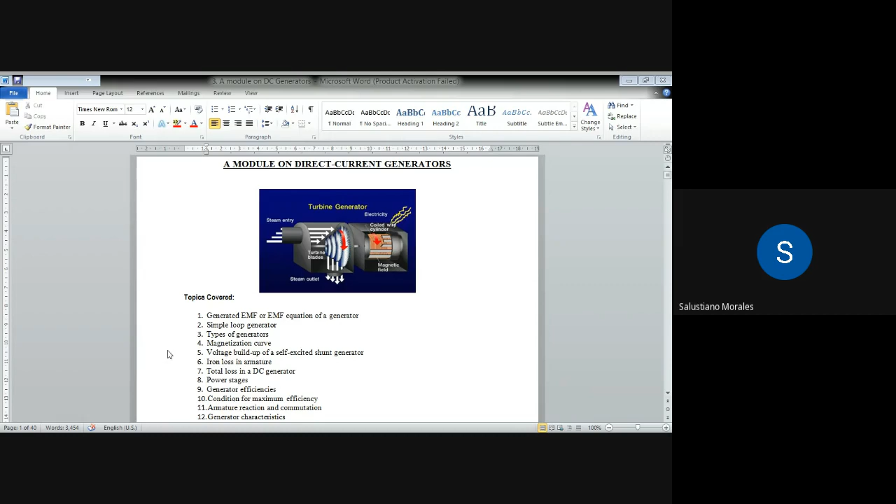So we go now with the next topic, about the direct current generators. So what are the topics we're going to discuss in this chapter? There are 14 topics. Number one is the generated EMF or EMF equation of a generator. Second, simple loop generator. Third, types of generators.

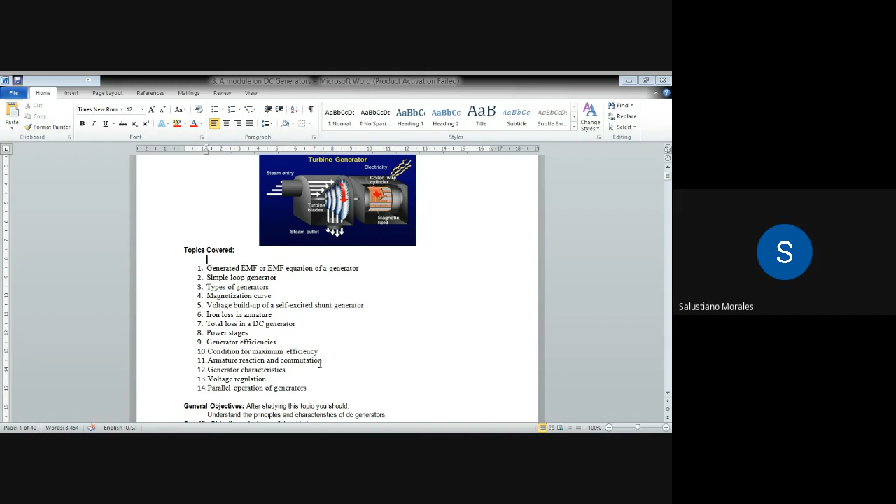Four, magnetization curve. Five, voltage build up of self-excited shunt generators. Six, iron loss in armature. Seven, total loss in a DC generator. Eight, power stages. Nine, generator efficiencies. 10, condition for maximum efficiency. 11, armature reaction and commutation. 12, generator characteristics. Next is voltage regulation, and the last is on the parallel operation of generators.

So general objectives. After studying this topic, you should understand the principles and characteristics of DC generators. Specific objectives: first is compute the average generated voltage of a DC generator given a machine's physical construction parameters. Second, know the different types of DC generators on the basis of field excitation.

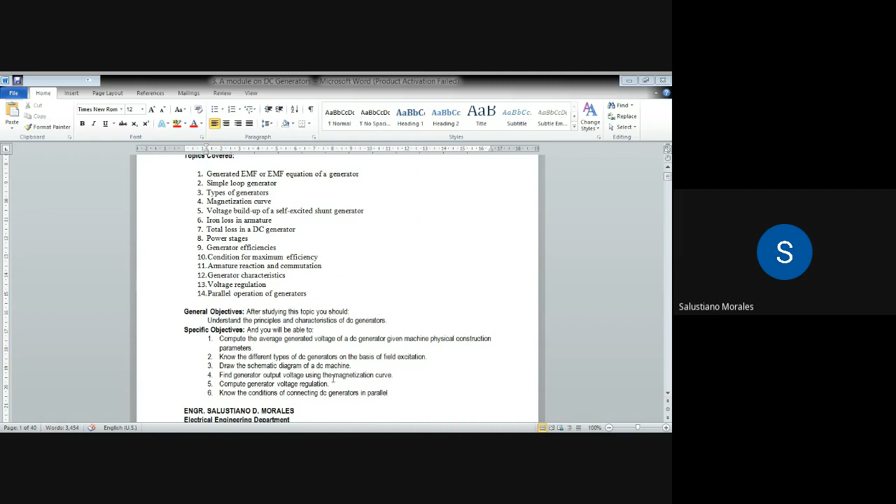Draw the schematic diagram of a DC machine. Find a generator output voltage using the magnetization curve. Compute generator voltage regulation and know the conditions of connecting DC generators in parallel. So we go now with the generated EMF of DC generators.

So let's try to read the given statement here: if a single conductor moves at a constant speed across a magnetic field of uniform flux density, 1 volt will be generated for every 10 raised to 8 Maxwells cut per second. So the average voltage now per conductor as it rotates at a speed of revolution per second, that

is equivalent to revolution per minute divided by 60, is EC equal to P times phi times N RPM times 10 raised to negative 8 all over 60, where EC is a variable that represents the average voltage per conductor, P the number of main poles, phi the flux per pole with a unit of lines

or Maxwells. We have also another unit for the magnetic lines of force or the flux in terms of SI unit, which is the Weber. And this Weber is equivalent to 1 times 10 raised to 8 lines or Maxwells. And the subscript RPM is the speed in revolution per minute. We only place a subscript there so that we can distinguish that the speed is in that unit.

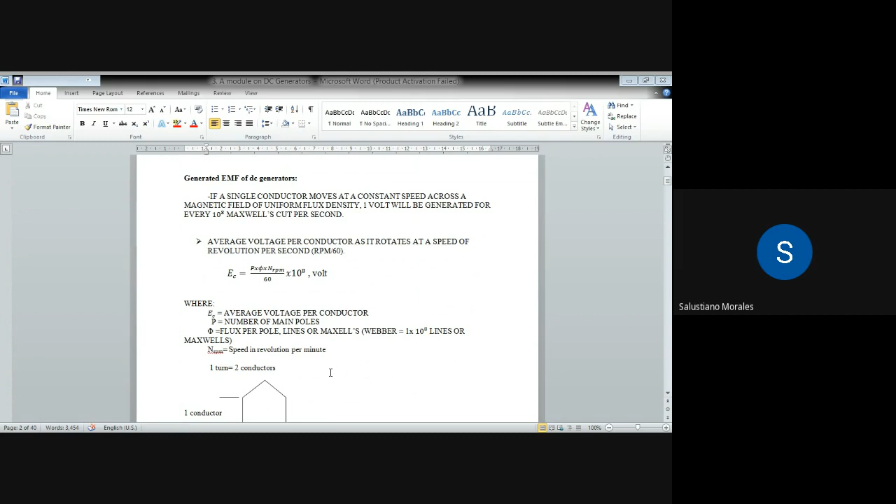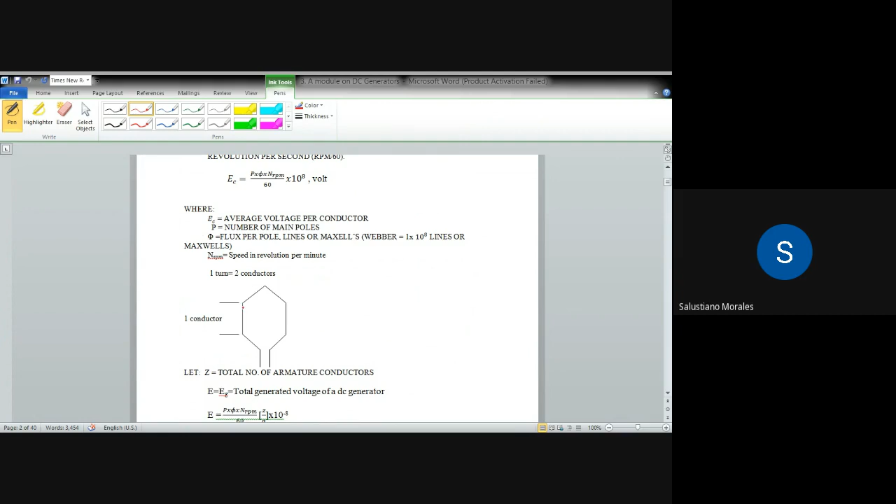And in our discussion, in one turn in a certain coil, there are two conductors. So it is represented by this figure here. So we have one turn, where is it? Okay, so this is one turn of a certain coil. So this side is considered as one conductor, and we have another conductor here.

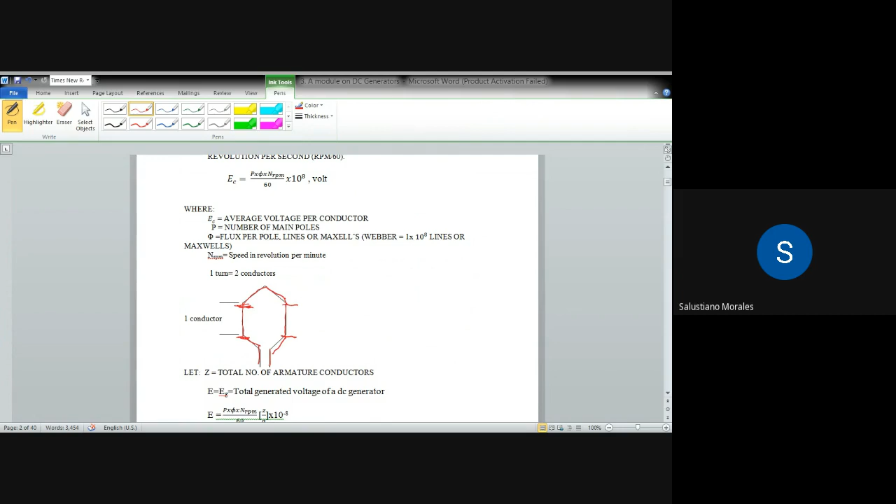So if we let Z be the total number of armature conductors in the armature windings, then the total generated voltage E or EG, the formula should look like this: E or EG is equal to the generated voltage per conductor, that is EC, multiplied by the total number of conductors divided by the number of parallel paths. So our equation will become like this.

So why is it that the total generated voltage should not be multiplied by Z? Because based from our discussion on the armature winding, the armature conductors or the coils are not usually connected all in series. They are connected parallel series. So for example, we have say two paths. So the conductors should be connected like that.

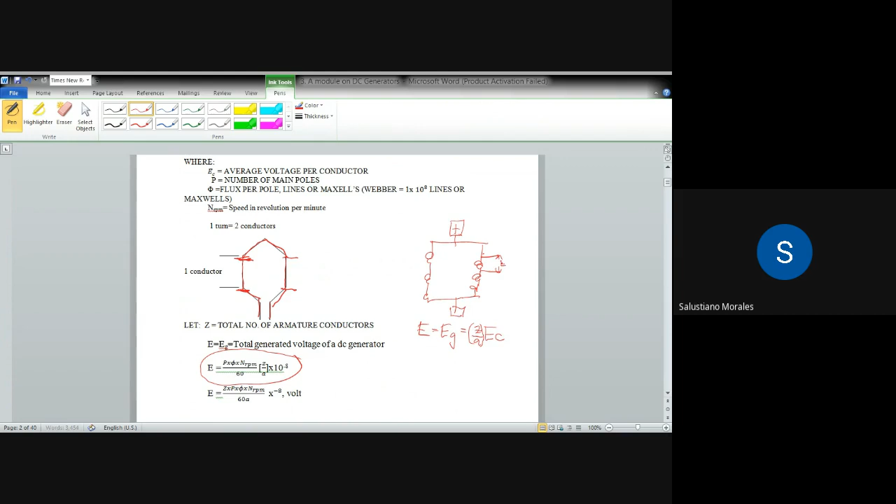So the generated voltage per conductor, assuming we have one conductor here, is EC. Then the total generated here should simply be equal to the number of conductors in one path, which is Z over A, so that formula. Okay, so Z over A multiplied by the generated voltage per conductor.

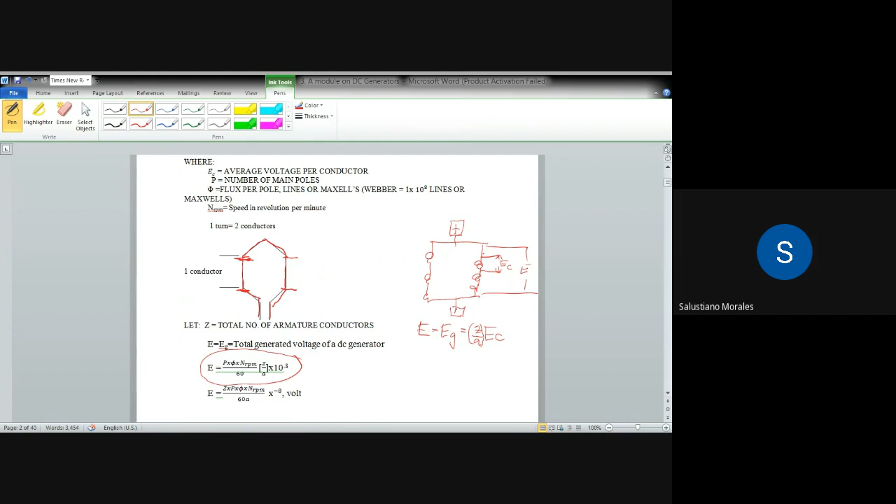So that is the reason why we multiply only Z over A by the generated voltage per conductor to come out with the total generated voltage. Since the paths are all connected in parallel, based from your circuits, we still have the same voltage output. Okay, so that is what appears at the brushes. It is the total voltage, the total generated voltage of the armature.

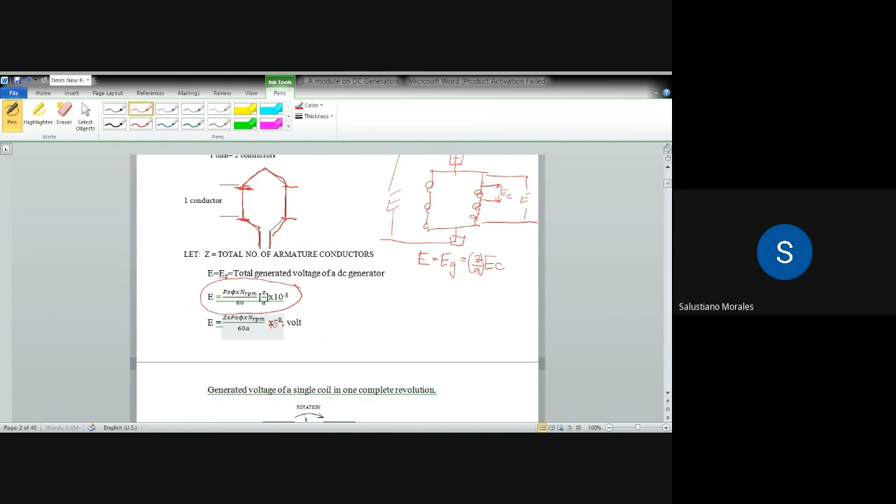So if we rearrange that, it should be Z P phi N all over 60A multiplied by 10 raised to negative 8.

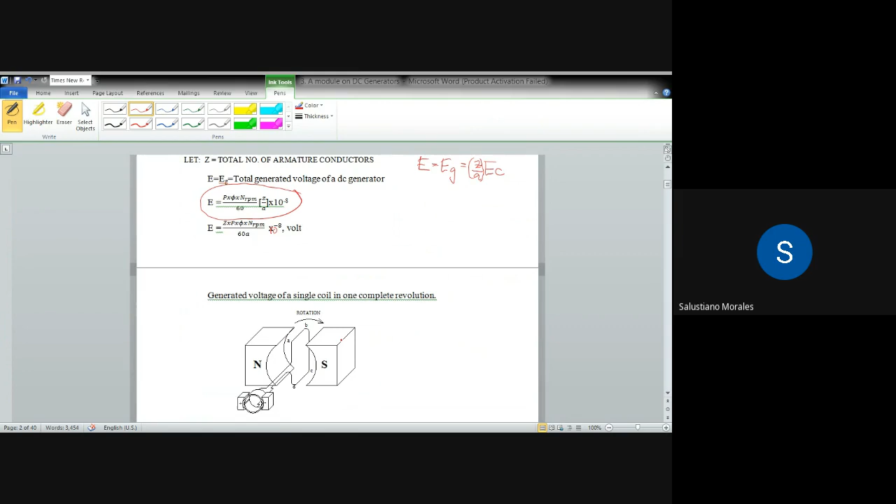Then let's discuss now the generated voltage of a single coil in one complete revolution. So we're going to rotate a single turn of a coil in one complete rotation, and we're going to see what should be the generated voltage of the one turn coil.

So we have an illustration here for the source of magnetic lines of force, that is a magnet composed of north pole and south pole. That source of magnetic lines of force may be a permanent magnet or electromagnet. Then we're going to place a one turn coil. Okay, so ito yung one turn coil here, there are two conductors here. We have conductor AB and conductor CD.

The ends of this one turn coil are connected to a commutator composed of two segments. And meron tayong two brushes here. We have the positive brush and the negative brush. So the arrangement of the commutator should look like this. So kung hindi nyo ma-visualize, it should look like this. So ganito yung division between them. The upper bar is connected to conductor AB, and the lower segment is connected to conductor CD, and meron tayong brush which is placed here.

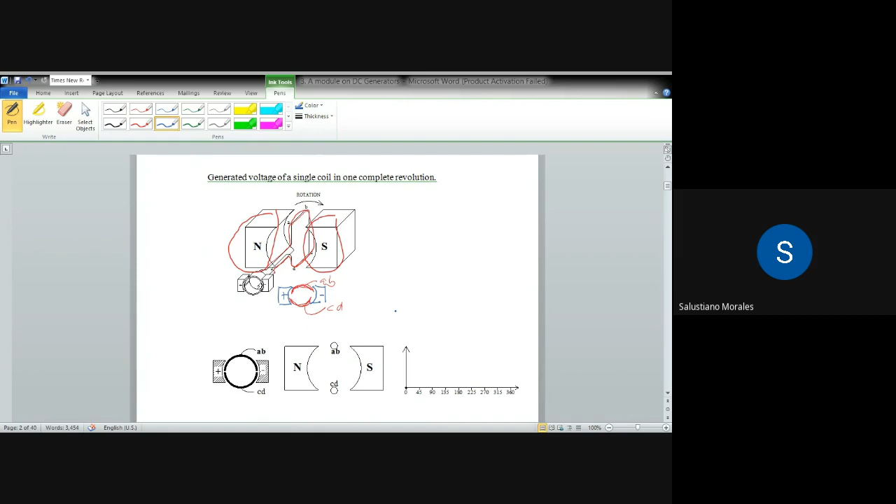So that we have a clearer construction of the drawing, we're going to represent that isometric view as a front view. So ito na yung drawing natin. We have the North Pole here, same as the figure above, and the South Pole. Then ito na yung conductor AB and conductor CD. Conductor AB is connected to the upper bar, as indicated here, and conductor CD is connected to the lower bar or segment.

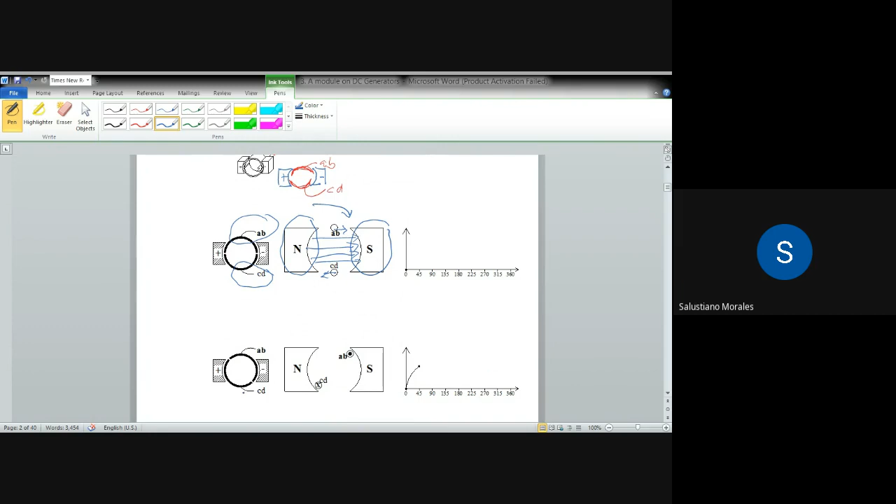So at this point, the peripheral velocity of the conductor is horizontal, so there's no cutting of flux at that position. Therefore, the generated voltage is zero. And then let's rotate the coil clockwise, like this. So conductor AB will go near the south pole, while conductor CD will go to the north pole. And the position of the brushes should also be tilted like this, because the commutator and the armature rotate at the same time.

So if you look at the peripheral velocity of the conductor, it will not cut the magnetic lines of force at 90 degrees or perpendicular. In that case, if the conductor cuts at a certain angle less than 90, the generated voltage is lesser compared to when the conductor cuts the magnetic lines of force perpendicularly.

Kasi yung illustration natin before, if we move a certain conductor and it cuts the magnetic lines of force perpendicular like this, then the generated voltage is maximum. But if the conductor cuts the magnetic lines of force at a certain angle, say we move like that, the generated voltage of this conductor is lesser compared to the generated voltage of the conductor in the first setup.

So ganun din ang mangyari dito. From zero at the first position of the coil, then it goes to this. The generated voltage will increase from zero to a certain value, not yet the maximum value. For the direction of the generated voltage using Fleming's right-hand rule, as we discussed in the first part of our discussion, the direction of the current at conductor AB is point, while the direction at conductor CD is cross.

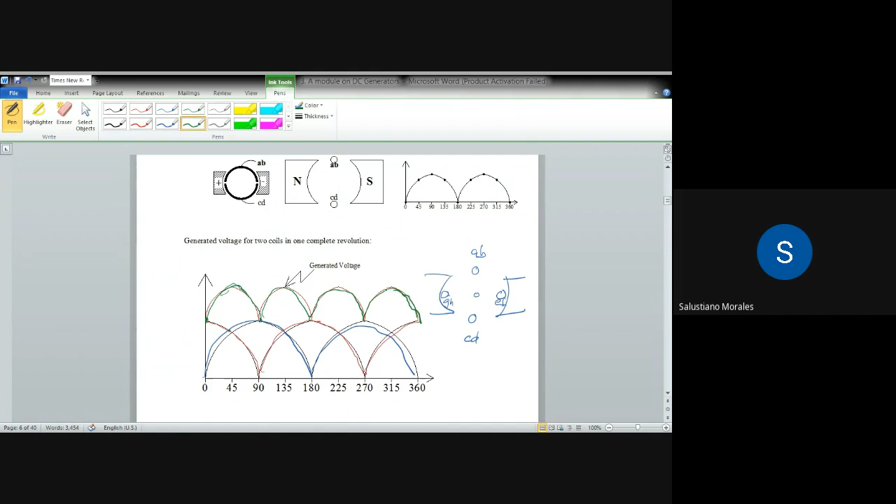So if you add these two waveforms, we will come out with this. So by point, so 0 and this one will start here. So yung green. Then again, 0 naman yung isa dito. Dito is times 2. So yan. Then like that. Okay? So ito yung total output of the generator. So makita natin na medyo unidirectional na siya, pero malaki pa rin yung fluctuation. So if you consider more coils, say like this, okay?

So as the coils now increase, you will notice now that the output of the generator will become smoother, okay? So liliit na liliit yung mga ripple natin dito. So still we have a fluctuation there, okay? So usually that is the characteristic of DC generator, but the output is unidirectional. So as the number of coils increases, makita natin dito, the output will become finer. Okay, so approaching a straight line. So that is the output of a DC generator.

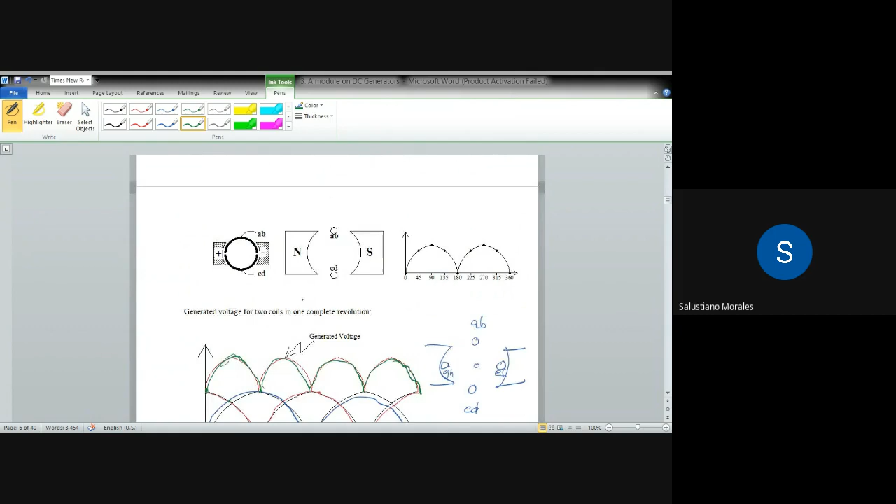So the commutator will serve as the rectifier that converts the alternating current voltage generated by the armature into a unidirectional voltage. Kasi kung walang commutator, ang gamitin natin is slip ring. So the output natin is usually an alternating current voltage because as the conductor rotates, the generated voltage reverses as it goes to the other direction of pole. So nakita natin dito sa illustration natin dito. So yan, that is the output.

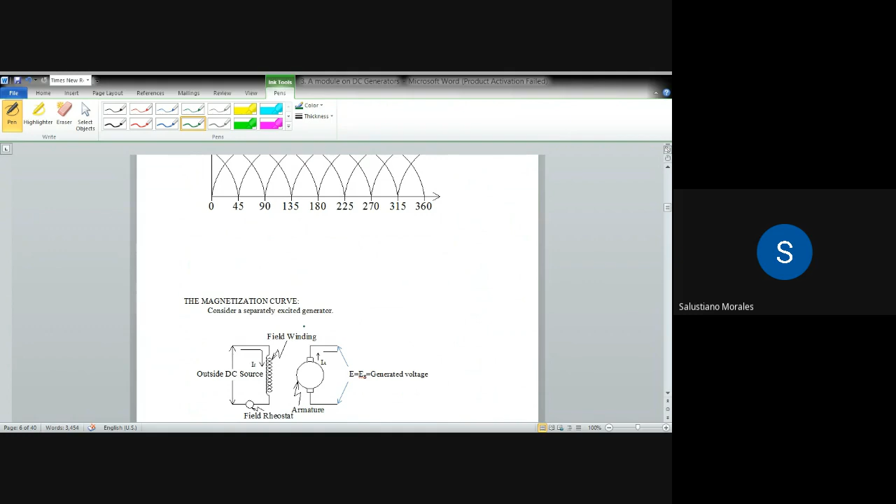Then next, we're going to discuss here is about the magnetization curve for a generator. So let's consider a separately excited generator. Usually this is one type of generator. Kung sinabi natin na separately excited generator, the field winding should be supplied by an outside DC source. By the way, we will discuss further this one as we go on with our discussion. So we use only this one for the construction of the magnetization curve.

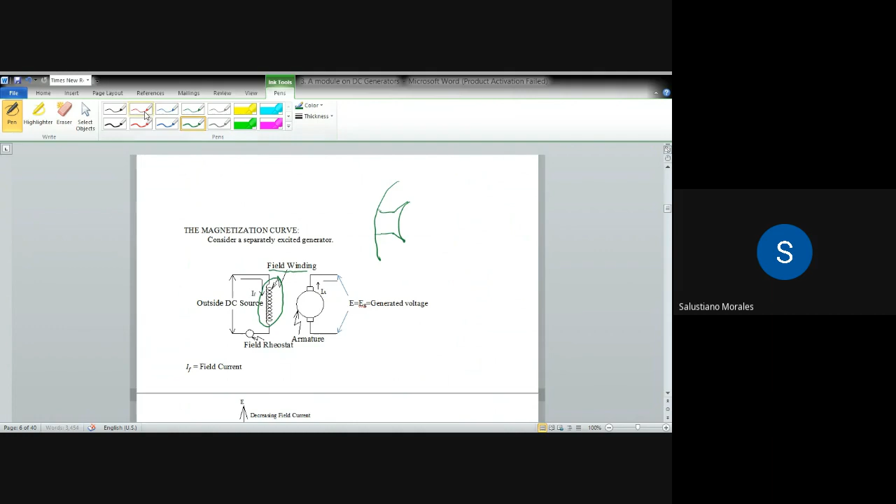So in the schematic diagram, meron tayong coil dito to represent now the field winding. So yun ang mga winding na nakalagay sa mga pole core natin. So assuming ito yung pole core natin, we have the winding here. Lahat-lahat yung mga pole cores natin. So that is the representation now, okay? Then meron tayong field rheostat. So we know now what is rheostat. It is a variable resistor. So we only rotate the knob of that rheostat. It will change the resistance maybe from 0 to a certain value.

So the purpose of this is to vary the current that is taken by the field winding, IF, which is called as the field current. So yung IF natin is called as the field current, which is defined here, okay? Then the armature should be represented by a circle, okay? So nandito na yung mga armature windings natin. Then commutator, then we have the brushes. And meron na tayong output dito. Yan, okay? So that is the schematic diagram for that given type of generator, which is a separately excited generator.

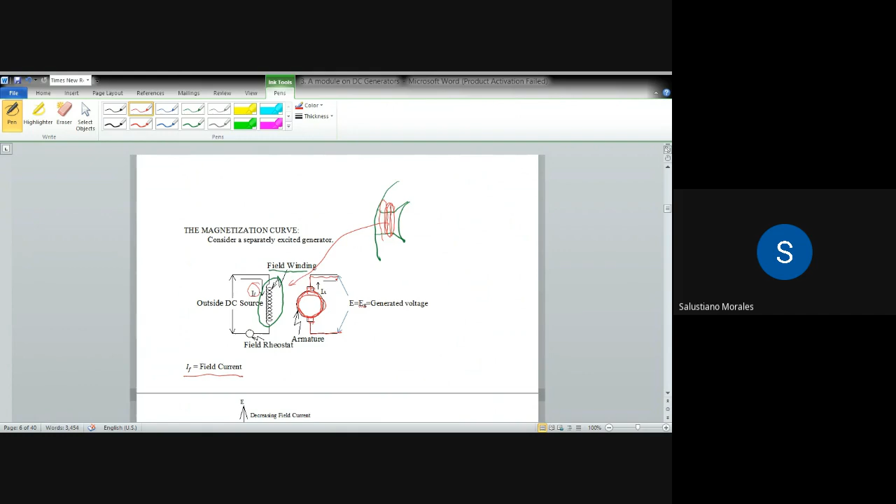So ang gawin natin dito is we're going to vary the field current maybe from 0, and we're going to increase that field current little by little, and we will observe what is the generated voltage of the generator. So yun ang gawin natin. But before we discuss the output, let's discuss first the characteristic of the magnetic steel that is used as the pole core. Okay, so let's consider another magnetic steel.

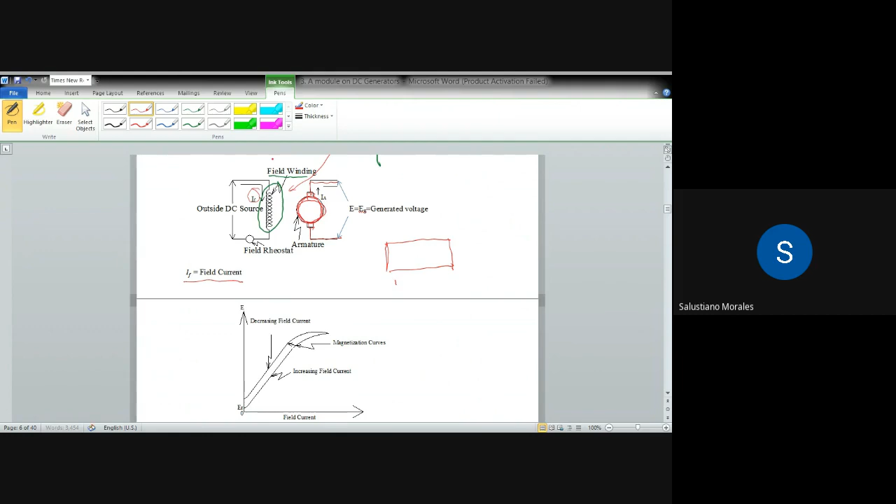We're going to place a winding in this magnetic steel, just the same as in the poles. So, bali ito na yung field winding natin. And gawin natin dito is we're going to apply a voltage. So, the same setup as in the schematic diagram. And we're going to vary the current using now rheostat.

The pole core usually meron siyang mga magnetic particles or magnetic moments. So maybe from your subject in engineering materials, so merong mga magnetic particles here which is randomly arranged. So the magnetic particles is made up of north and south polarity also. So maybe for this case, maybe this is north, this one is south, then again this one is maybe north, south. So randomly yan. So maraming magnetic particles for this.

So if the magnetic particles are randomly arranged, that magnetic steel has no magnetism or magnet. Okay? So wala siyang magnet. So wala pang na-apply na voltage, and these magnetic particles or magnetic moments are randomly arranged. Wala siyang magnetism. Okay?

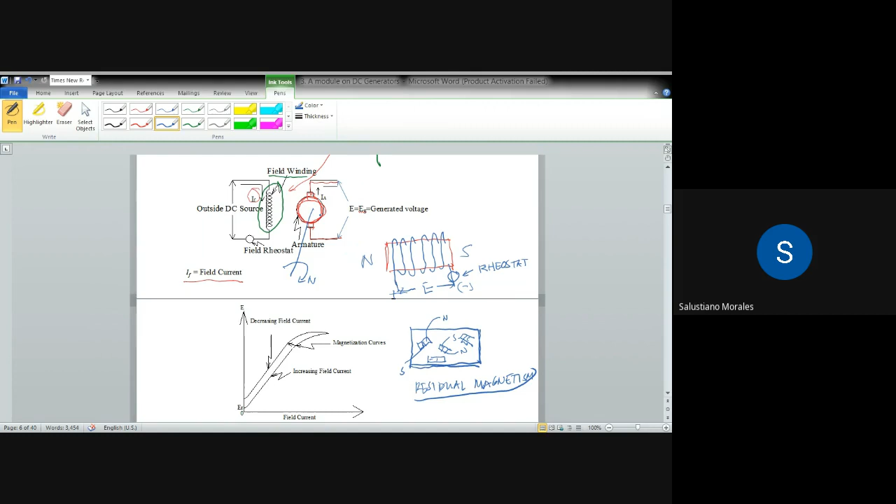And that small amount of voltage is usually called as the residual voltage. So, ito nandito sa mga discussion natin. So, ER is the residual voltage. So, meaning that the generated voltage will not start zero at field equal to zero. So, it will start now with this value. So, ER. Then, as the field current increases, the tendency of the magnetic particles will further arrange, causing to increase the magnetic lines of force or the flux, and also the flux produced by the coil. So, i-add natin yan. What will happen is the generated voltage also increases.

Based from the formula that we discussed kanina, that the generated voltage is Z P flux speed over 60A times 10 raised by negative 8. So we already increased the flux. Therefore, the generated voltage also increases. The increase of the voltage with respect to the increase of the field current is linear or directly proportional if the condition of the iron is unsaturated condition. What is that unsaturated condition?

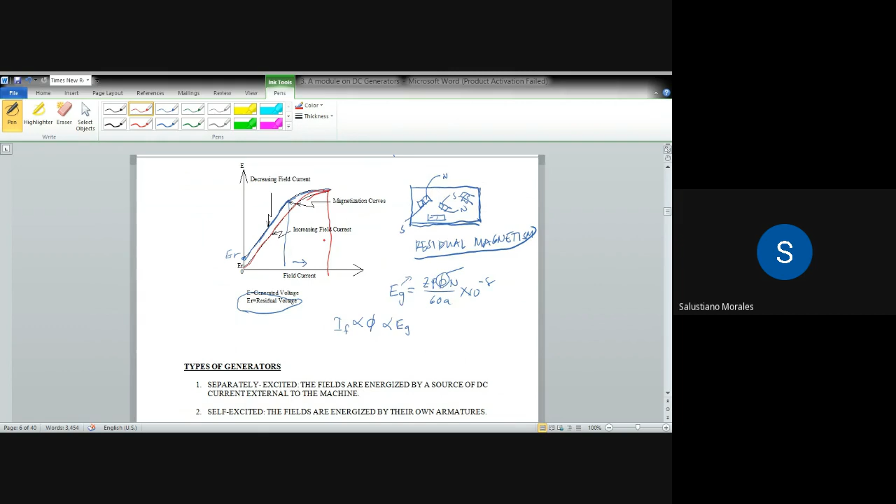Then we go now with the types of generators. So the first one is the separately excited generator, where the fields are energized by a source of DC current external to the machine. So the same as in our illustration kanina, the voltage that we use to supply the field winding is from another source, maybe from another generator, a battery, or whatever source of DC voltage.

While the second one is called the self-excited. So the fields are energized by their own armatures. So no need to consider another source of DC voltage. So whatever the output of this generator is, it is the one to supply now its own field winding.

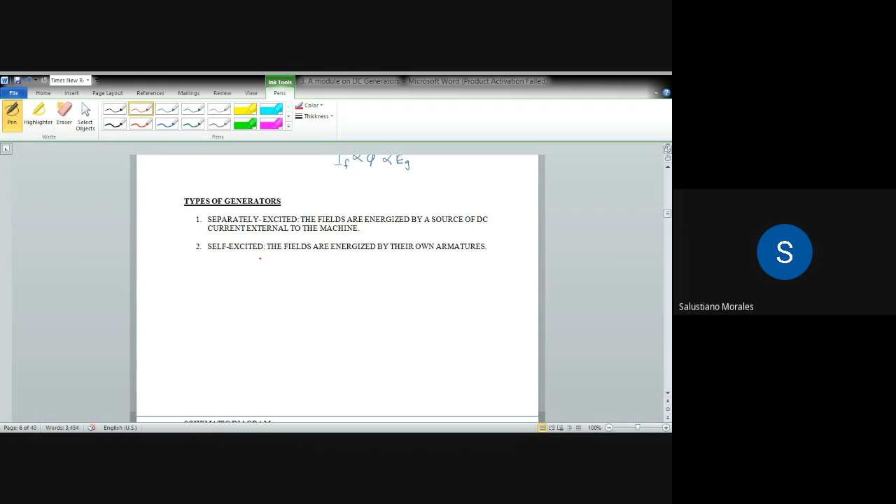If you're going to compare now this separately excited and self-excited sa tao, yung separately excited should be yung mga married. Itong self-excited is yung mga single. Okay? So, hindi na natin i-elaborate yan. Okay? So, alam na natin yan.

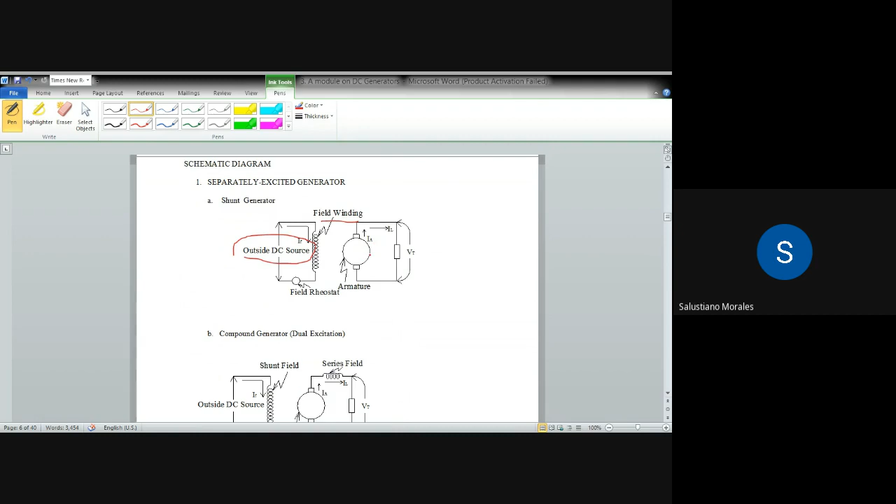So, we go with the schematic diagram for these two types. We consider first the separately excited generator, same as in our illustration and the discussion for the magnetization curve. So, you can see here that the applied voltage to the field winding is coming from an outside DC source. Then we have the armature. Then meron tayong load dito. Yan. So we will define later on yung mga variables natin, just like IA, which represents the armature current, and so on.

Then meron din tayong compound generator under separately excited, or this is called the dual excitation. So meron tayong dalawang klase ng field winding. One is called the shunt field and the other one is the series field. What is the difference between these two? The series field is usually made up of a larger size of conductor and lesser

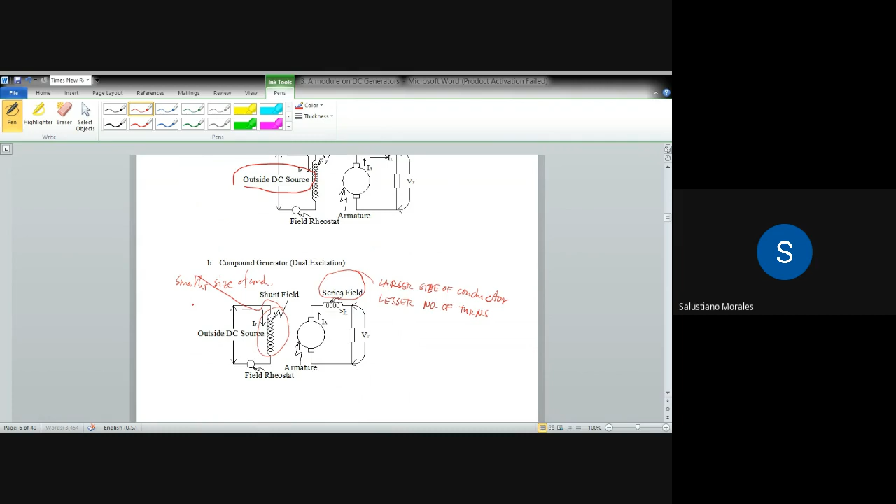number of turns. Usually the size of the field winding will depend on the capacity of the generator. Kung ang maximum current delivered by the generator is maybe 100 amperes, kailangan the size of the series field winding should also be capable of carrying that amount of current. While the shunt field is usually a smaller size of wire or conductor, and also more number of turns.

Because this one will only carry a small amount of current, only enough to magnetize the field winding. So that is the difference between these two. So in our illustration, we can see in the drawing that there are more turns for the shunt field, and here in the series field, there are fewer turns.

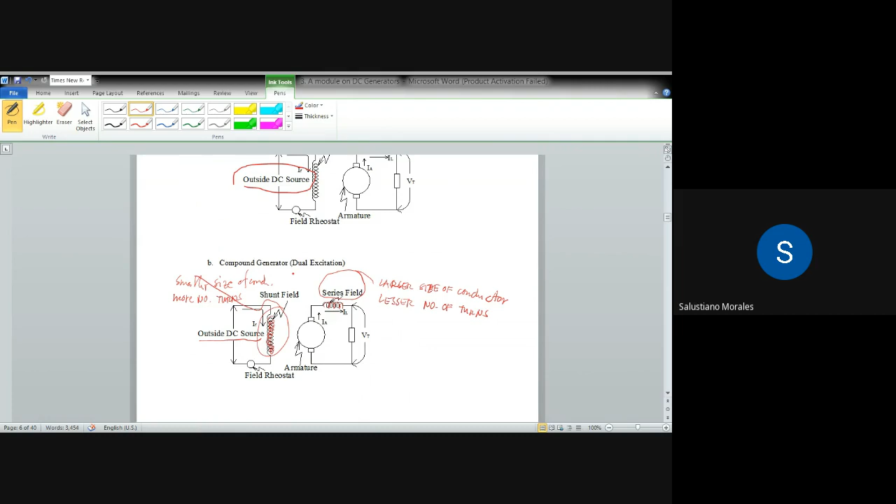So the shunt field should be energized by an outside source, while the series field should be energized by the armature. So whatever current is produced by the armature, that is what excites the series field. So it's like a combination of separately and self-excited generators, which is called here the dual excitation.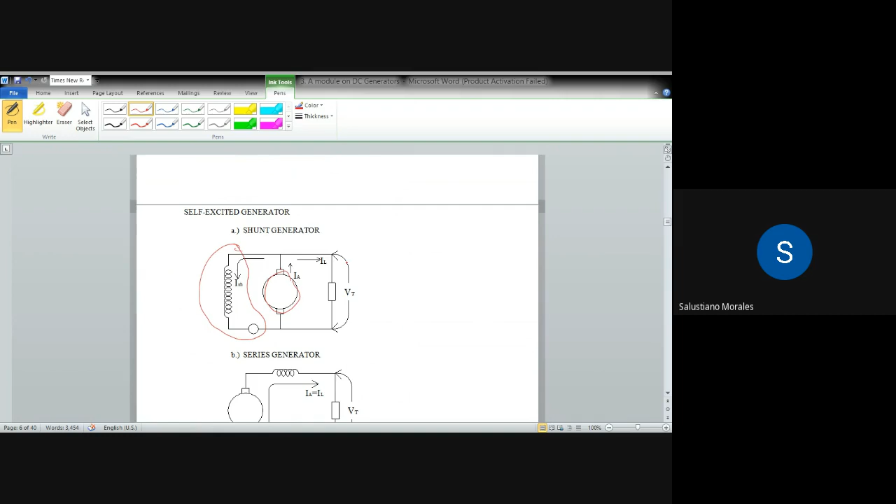For the series generator, we use the series field winding. Okay, so the winding we use is the series field. This is the shunt field. This one is the series field. So we can see the series field and the armature are connected in series. So that is called the series generator.

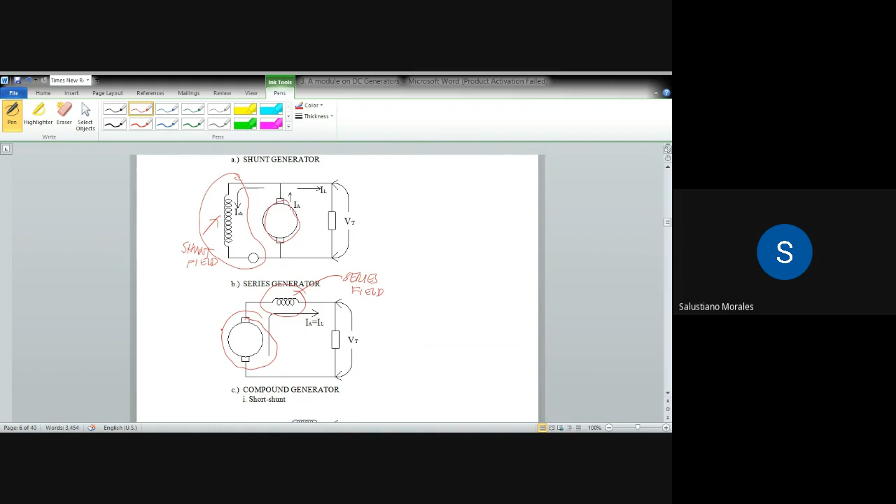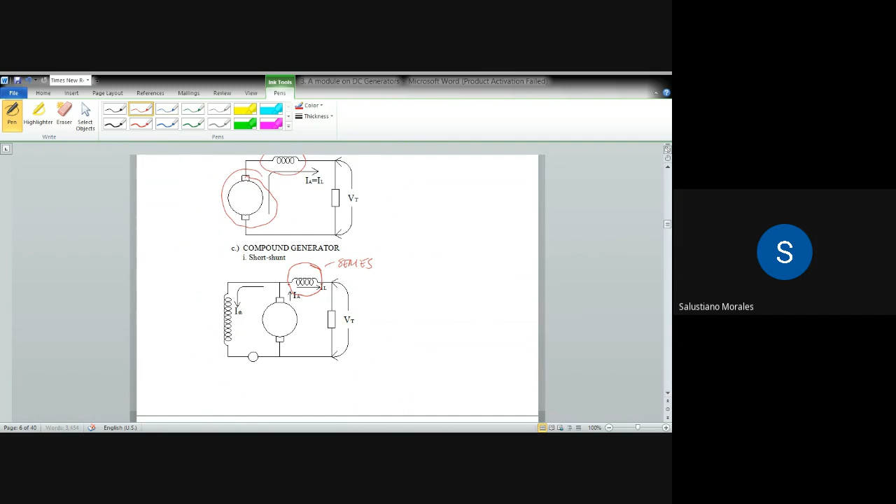The third one is the compound generator. We also have two arrangements for this: what we call the short shunt compound generator, and the long shunt compound generator. The only difference between these two is the connection of the series field. So this is the series field. If the series field is connected in series with the line supplying the load, because this is our load, then we have a short shunt.

For the long shunt, the series field is connected in series with the armature. That's why we call it long shunt, because this is its reference. This is longer, because we inserted the series field in series with the armature, so we have a longer part here. That's why we call it long shunt compound. In the short shunt, the part at the armature is shorter. That's why we call it short shunt.

So we have a basis for familiarizing the arrangement between the short shunt and the long shunt. Because if we have a problem to solve, and the generator is a compound generator, say short shunt or long shunt, if we come out with a wrong diagram, then our solution will also be wrong. So we're going to place the correct schematic diagram. That is one way of familiarizing the schematic diagram between long shunt and short shunt, and the connection with the armature. If it's in series with the armature, long shunt. If not, short shunt.

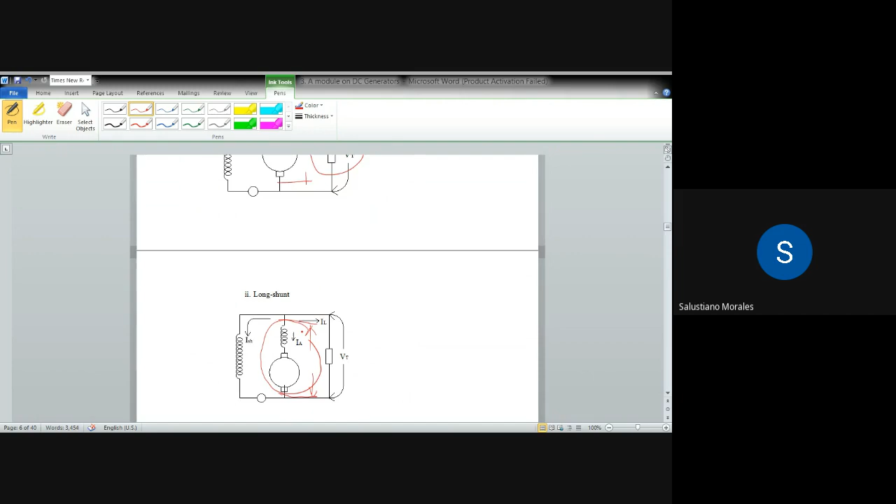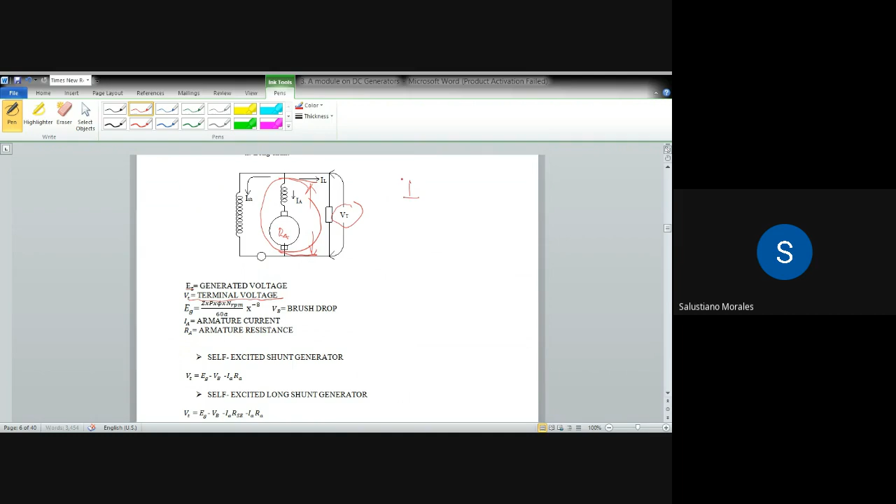So let's define the variables we're going to use here. Eg is the generated voltage; our formula is ZpΦN over 60a times 10 raised to negative 8. Vt is the voltage across the load or terminal voltage. Ia is the armature current. Ra is the resistance of the armature. Our field current, Ish, is usually called the shunt field current. Later on, we also consider the current flowing in the series field, usually called the series field current.

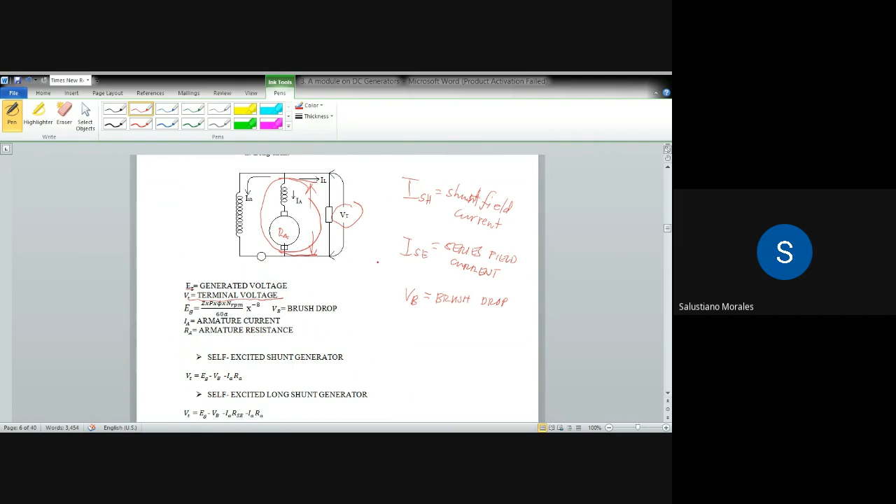We also have a voltage drop on the brushes due to the resistance, and we let that be our Vb. That is the brush drop, or brush contact drop. Okay, those are the variables we'll use so that we can formulate different equations for every connection of generators, whether separately excited or self-excited. Those are the types of generators. Next meeting, we're going to discuss the relationship of these variables applied to every connection.